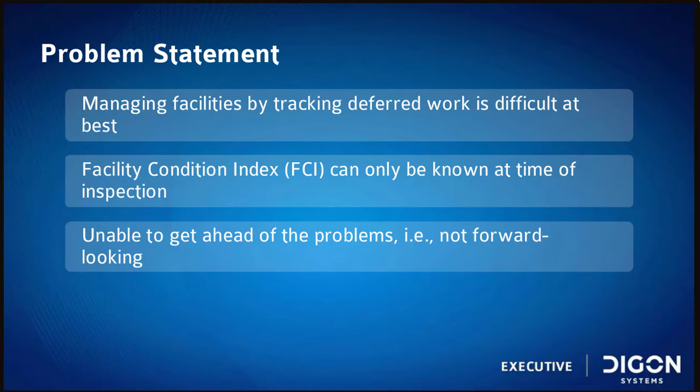With this method, the building's Facility Condition Index, or FCI, is correct for a single moment in time. In other words, that week or two when the inspections were accomplished. It's a single data point that becomes less useful to decision makers the further we get from that inspection date. We have no ability to forecast into the future with this method, other than by guessing. By using old data to guess at our future needs, we are actually trying to manage the future by looking at the past.

Imagine driving down a curvy road. The road ahead represents the future, and the curves represent the uncertainty of your facility's needs. Using the deficiency model to manage our facilities, the past, seen in the rearview mirror, is all we can see. The future is obscured. If the rearview mirror is the only tool available to the driver, it only takes one curve in the road ahead to cause an accident.

And yet, every day, facility managers use deferred maintenance, or FCI, to guide future facility budget needs. Seems a little crazy, right?

Seeing this, the Department of Defense sought out a new solution. In February of 2013, the Institute for Defense Analyses published a study of federal facility management practices and made recommendations for the future. They said that we really need a metric-based, data-driven system that is continually updated so data remains accurate and relevant. It should be forward-looking and risk-focused. This would allow anticipation of facility problems coming at us rather than just reaction to problems that have already arrived.

Later that same year, in September 2013, the Office of the Undersecretary of Defense for Acquisition, Technology, and Logistics mandated that all of the Department of Defense, or DoD, will use the Sustainment Management System, or SMS, as the system of record for strategic facility planning. The memo, which you can read by clicking on the View Document button, gives reasons for the decision, such as standardizing the facility condition assessment process, ensuring reliable, consistent data, and giving more credibility to the DoD Asset Management Program. Since this solution is a federal asset, it is free of any licensing cost for government users.

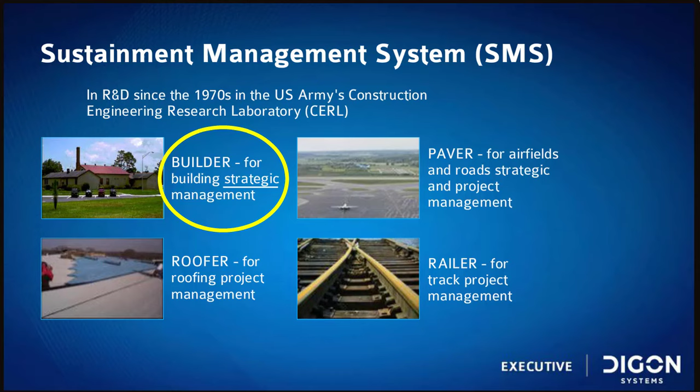The SMS embodies Builder, Paver, Roofer, and Railer. Each of these systems is specialized for their focus areas: buildings, pavement, railways, and roofs. Builder, though, stands out as a purely strategic planning tool and not also a project execution tool.

Builder is web-based, so it can be accessed from any internet-connected computer through its web browser. The data in Builder is stored in the cloud and is available immediately whenever an analyst needs it, but is highly secure against outside intrusion. The modern web service infrastructure enables our CMMS system to integrate with Builder. Keeping your new strategic planning tool connected to your existing project management system is critical. Builder data can be downloaded into offline, handheld tablets for easy field assessments away from internet connectivity.

The Builder software breaks every building down into small pieces called sections. Examples of sections are, for instance, 3,000 square feet of exterior brick wall, one 30-ton chiller, 45 interior wood doors, or all exit lights on the 5th floor.

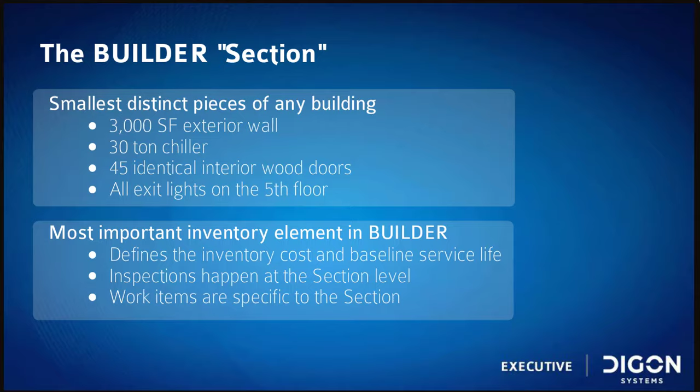Inventory details are captured for each section, enabling Builder to know expected life and replacement costs. When inspectors are in the field inspecting a building, they're inspecting individual sections. And when Builder determines that work is needed, the work items created are at the section level. In fact, almost all of the calculations in Builder happen at the section level.

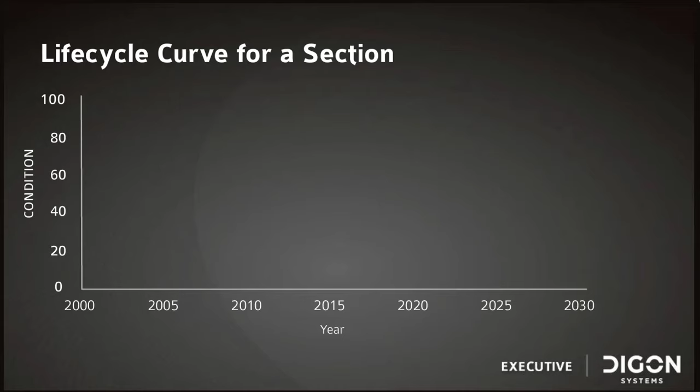Builder already knows certain things about all sections in a building. This preloaded data comes from industry-recognized construction data providers. One of the most important things Builder knows is each section's expected lifespan, or more precisely, life cycle.

This graph shows a generic section life cycle. Time is on the x-axis, and the section condition index is on the y. When the section is installed, it is brand new, and its CI is 100. As time passes, we move along the curve to the right. Notice how the condition remains high early in its life, but as it gets older still, deterioration accelerates more rapidly.

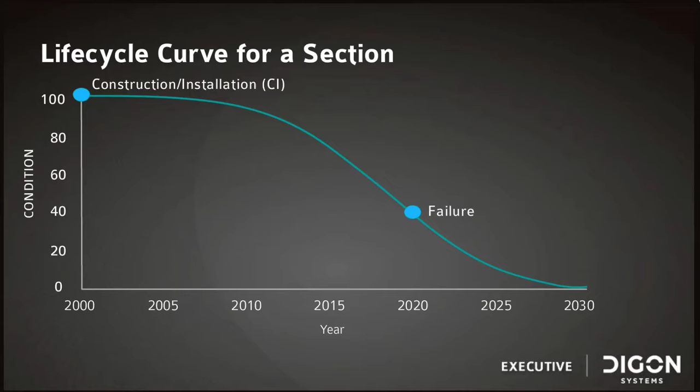When the CI reaches a score of 40, it is no longer reliable, and so Builder considers the section to be at failure. This section's expected service life, then, is 20 years. The Builder database contains curve data similar to this one for thousands of sections.

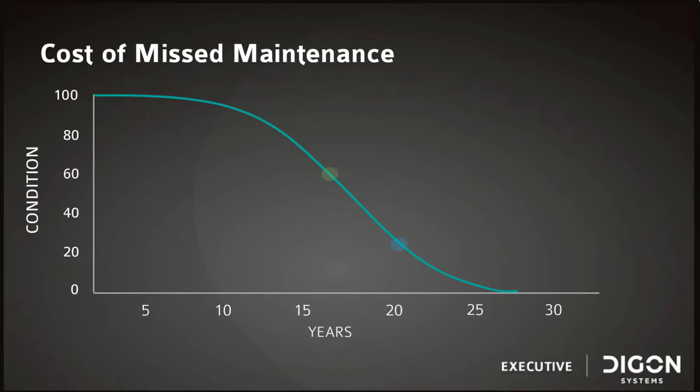Builder also knows the cost to repair or replace each section in a building. With this lifecycle chart, again depicting a generic section, we can discuss the cost of deferred maintenance and the proper timing of that maintenance to minimize the cost. The two dots on the curve show different investment decision points. The green dot, at a CI of 60, represents a time when Builder might recommend a repair to this section.

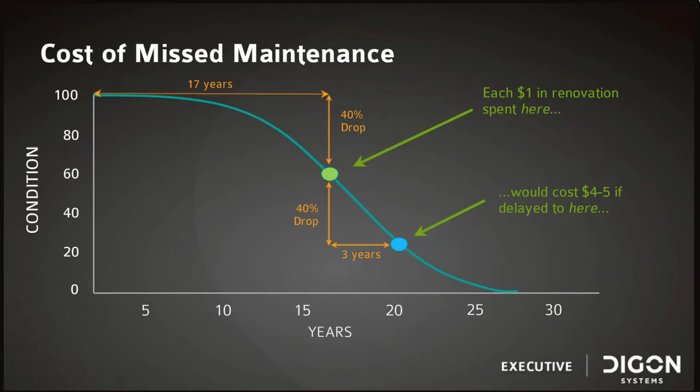The blue dot further down, at a CI of 20, is past the failure point. To repair the section at the blue dot would cost 4 to 5 times as much as it would have cost to repair it earlier, as Builder recommended. Notice also how the same amount of deterioration, 40%, occurred during the last 3 years as occurred during the first 17 years. The cost of deferred maintenance is high and measurable. This is one way Builder can help you optimize your investments by minimizing the costly penalty of missing timely work actions.

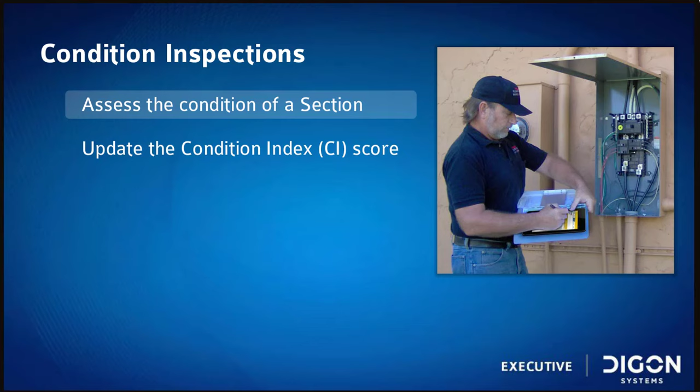Using the RS Means lifecycle data and graphs to predict section condition works well, but it can't predict local conditions or events that are outside of the standard data model. Additional real-world data from the field is needed to make that curve reflect the condition of the building and sections even more accurately. The Builder condition inspection is performed by trained inspectors to assess the condition of a section at a single point in time. Think of it as a snapshot. The inspection updates the condition index.

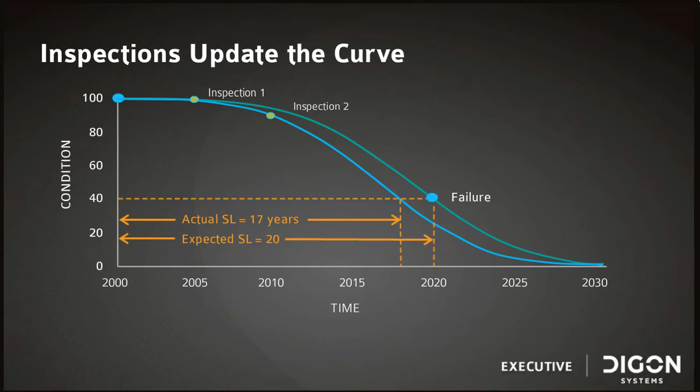Notice what Builder does with this new data. It updates the CI with a new lower rating and adjusts the remainder of the life cycle curve to reflect the higher rate of deterioration. Now, rather than an expected total service life of 20 years originally predicted, this section has a shorter expected service life of only 17 years because of the on-the-ground data provided by the inspector.

Okay, so we've talked a great deal about sections. It's time to show how they relate to the big picture. Sections collect and organize the assets inside a building. Taken all together, they reflect the building itself. But before we can show you how that happens, we need to present the organization of those sections within a building. Builder uses the Uniformat II system, which is an industry-standard method of organizing the parts of a building.

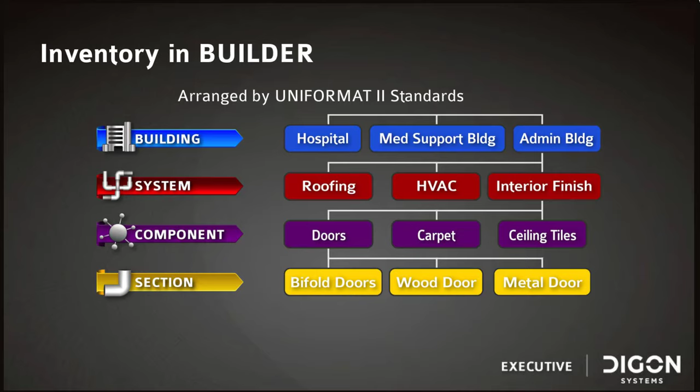The building is made up of many systems, such as roofing, HVAC, and interior finishes. Every system is comprised of components to further categorize the inventory. So the interior finish system has doors, carpeting, ceiling tiles, etc. And finally, under each component resides the many sections. So under the doors component, we might find bifold doors, wood doors, and metal doors.

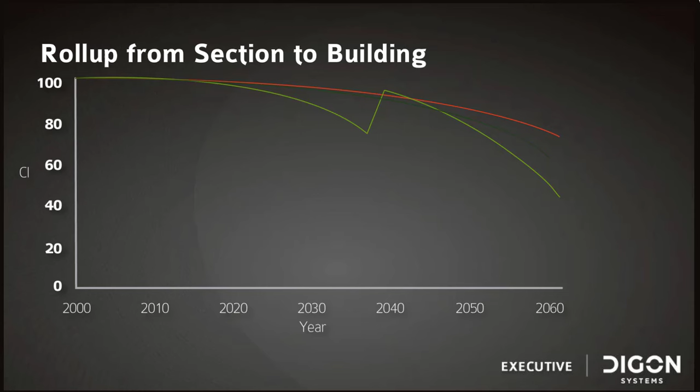Here is where the real power of Builder starts to become evident. A building can be comprised of thousands of sections. What if we could see them all at once? Let's start with exterior walls, then windows. Next, let's add carpeting. You get the picture. Each curve represents a section, and they add up quickly.

By overlaying the life cycle curves of each of those thousands of sections onto one graph, we can see the condition of the entire building in one glance. The only problem is the sheer quantity of data in front of us and the difficulty reading it in this form. This is where the roll-up becomes necessary.

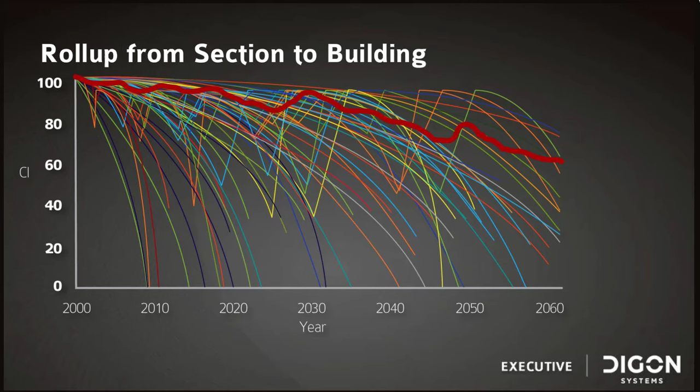The Builder software takes all of this data from the sections and will roll up the condition scores. So Builder can provide an overall condition rating for a specific component or system, or most usefully, the entire building. This building level condition index is called the BCI. You can see by this graph how the BCI, indicated by the thicker red line, is calculated as an aggregate of the section condition indices.

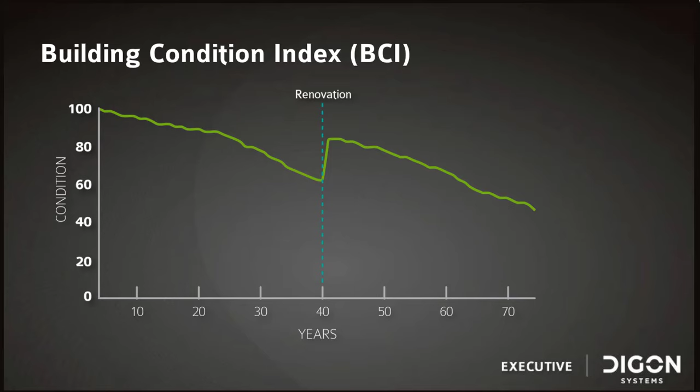Each little bump represents a small increase due to a section or sections being repaired or replaced at that point in time. The large jump you see near the middle of the curve is due to a major renovation to the building, which repaired or replaced many sections at once. The BCI is a facility manager's metric for assessing the building's overall reliability. As the line gets lower on the scale, the reliability of the building as a whole decreases. But BCI alone does not provide the full picture of our building.

Adding to that full picture is another of the high-level metrics in Builder, the functionality index. A building's FI score indicates its ability to serve its intended purpose. For example, how well does this new office building fulfill the role of division headquarters? The questions that lead to this score include configuration, energy usage, and compliance issues like ADA.

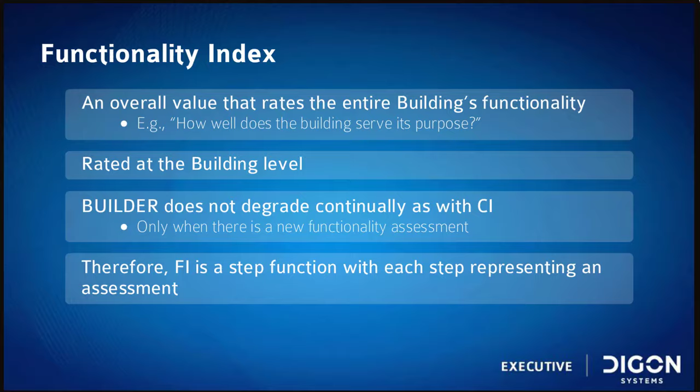Functionality is assessed at the building level only, so smaller parts of the building, such as sections, are not rated individually as they are with condition rating. Another difference from condition rating is that the FI does not degrade continually in the software. The FI changes only when there is a new functionality assessment. So it ends up looking like a step function, with each step representing a new assessment.

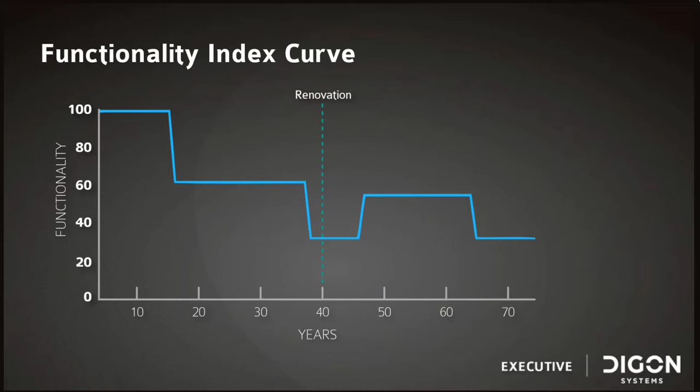Here is a functionality curve, if you will. Each time the line drops or rises, a functionality assessment has occurred. Notice that the major renovation to the building did improve the FI rating, but the improvement wasn't recorded until several years after the renovation was completed. The functionality improvement had to wait until the next assessment occurred to make it into Builder.

The single building level metric that can be used to identify how well a facility performs is the Performance Index, or PI. Derived from combining the BCI and FI scores, the Performance Index gives planners and managers an idea of a building's overall ability to support the mission reliably. Now we're able to see this big picture of how our building is doing. So the commander now has a metric that can give her a level of confidence that the base hospital can meet the demands of the mission without failure.

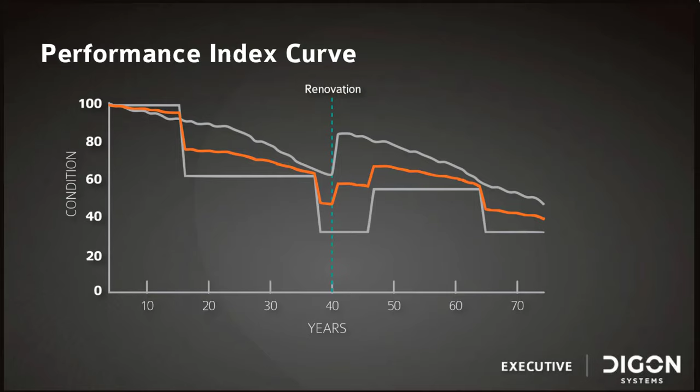It's a rating of a building's overall performance, and the algorithm uses a combination of the BCI and the FI to calculate. Here you can see how the Building Condition Index and Functionality Index lines in gray are combined to create the Performance Index in orange.

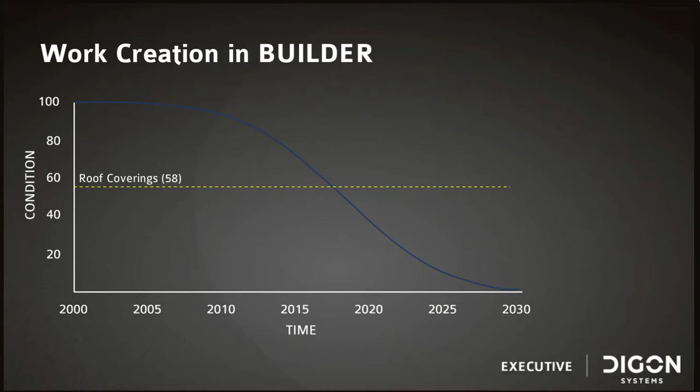With a good understanding of the condition curves and indices, we can now move on to work creation in Builder. This is the process where Builder determines that a section's condition is below the standard set by the organization. In this case, we have a section of roofing. The standard that has been set for this section is a CI of 58. This means that the Builder user wants this section to be maintained at a condition index of 58.

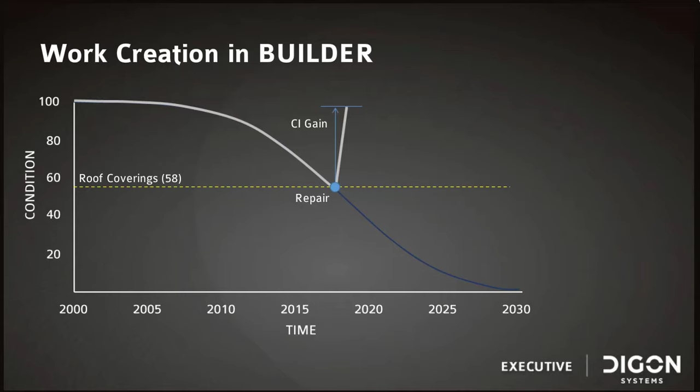When the section falls to this level, Builder assigns that section to be repaired. Once that work is completed and the data is updated in Builder, a new curve is drawn for that section. You can see the gain in the condition index to a nearly new state, or a CI of 95.

Then a new but steeper curve is drawn to the right. It's steeper because repaired items degrade faster than brand new ones. Service life was added to the section, extending its service life by about 10 years.

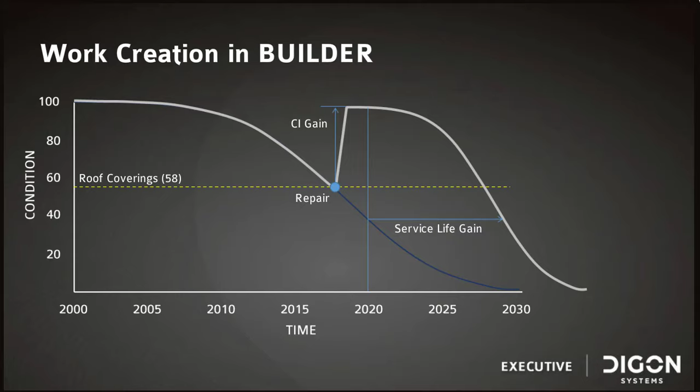In a traditional inspection, the assessor identifies work. In Builder, the assessor tells the organization the condition, and the organization can set what is good enough and what needs work with a uniform and systematic approach.

We talked a moment ago about how the system creates work. This was a prelude to the work configuration process. Prior to creating the work plan, the system must learn the values of that organization.

These organizational values are translated into Builder through the creation of standards, which are like condition index tripwires, policies that guide the application of the standards, priorities determine which work items are most important, and funding, how much money is available and how it may be used.

The work configuration process is complicated, but as executive-level decision makers, it's important you understand generally how the process works so you'll know how and why your data was derived when it lands on your desk. Click play to start a short video.

Let's look at facility work planning. Work planning is the creation of work items in a building and the order in which that work should be completed. The traditional method, the one that's been around for years, is based on the deficiencies found by inspectors. Deficiencies are items which have been found to be in disrepair or are inoperative.

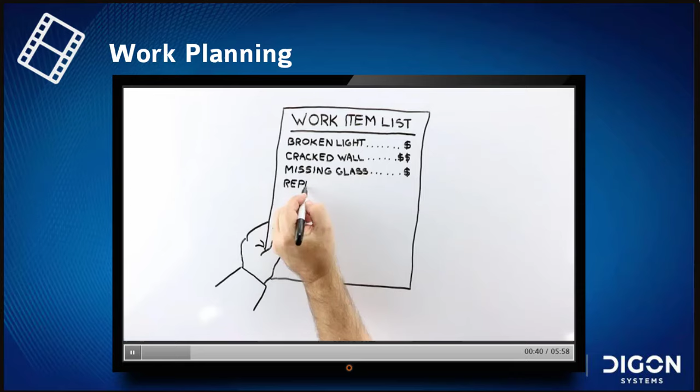The inspector finds items that are broken or are in some other way not good enough and records them as deficiencies. And then he or she estimates the cost to repair or replace them. That list of deficiencies becomes the work item list. It is entirely dependent on the perspective and experience of the individual inspectors. So there can be great variance in the results if multiple inspectors are used across your property portfolio.

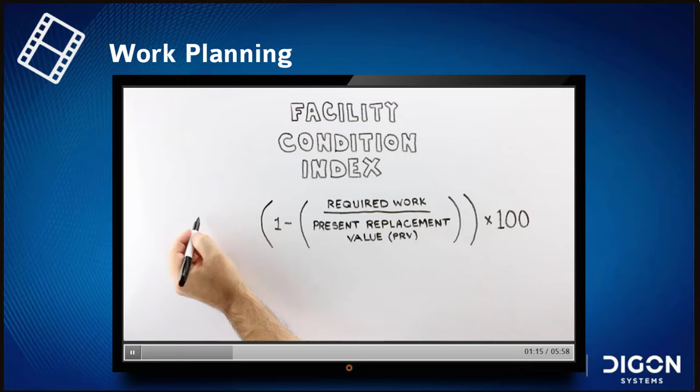One of the most important results is the Facility Condition Index, or FCI. The FCI is the cost of required work, maintenance, repair, and replacement, divided by the present replacement value of the building. In this traditional model, required work is only the deficiencies that were seen and recorded by the inspectors.

On the other hand, Builder uses an engineered, repeatable, transparent, and defendable approach to work planning. In Builder, the software looks at every single building component. Every building component is evaluated using a series of algorithms. We're going to represent these very complex processes here as a series of boxes. The first box is called the work generator.

The Builder algorithms are guided by a set of rules that have been put in place by the Builder user. These rules begin with standards, which are specific condition values that act as triggers for generating work. They will be compared against the actual condition value of the components in the building. Policies are the rules for how the standards are to be applied to the different kinds of components. These rules will be applied to each component once the conveyor belt starts up.

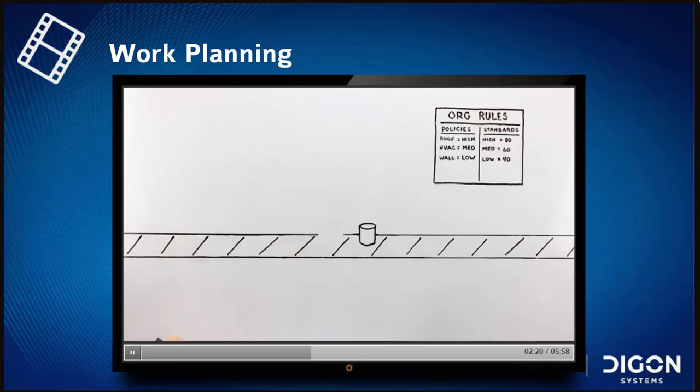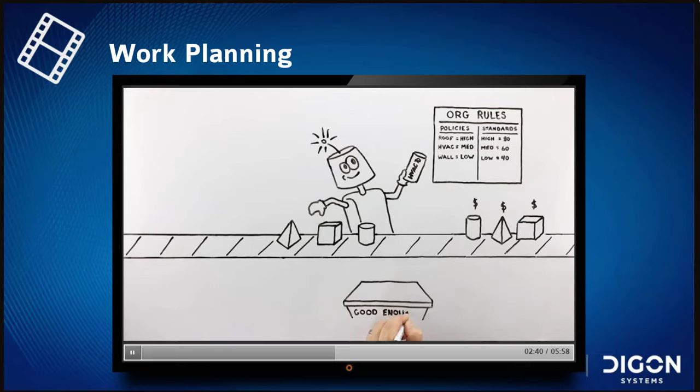The output of this box will be components that do not meet organizational expectations for condition. The organization's policies establish the condition standard that each component must meet. Each of these components, which are now called work items, also have an associated cost for the repair or replacement work needed. Components that meet organizational expectations are not selected for work and move out of the process. You probably have thousands of components in your buildings, but Builder completes this process in just a few seconds.

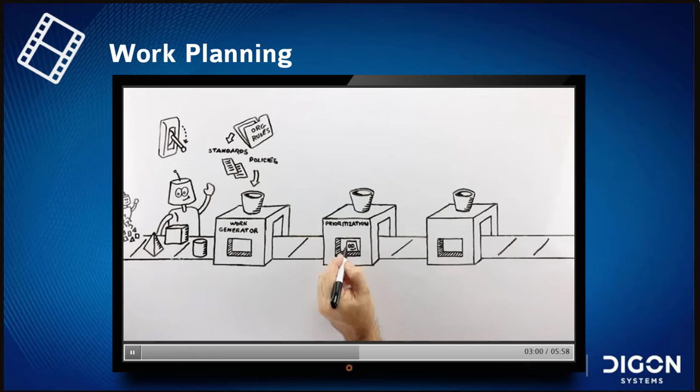The next box in this series is prioritization. This set of algorithms will determine a prioritized order to arrange the work items, based on the importance placed on certain attributes of the components themselves. These rules, which are planned and selected by the organization, are called the prioritization scheme.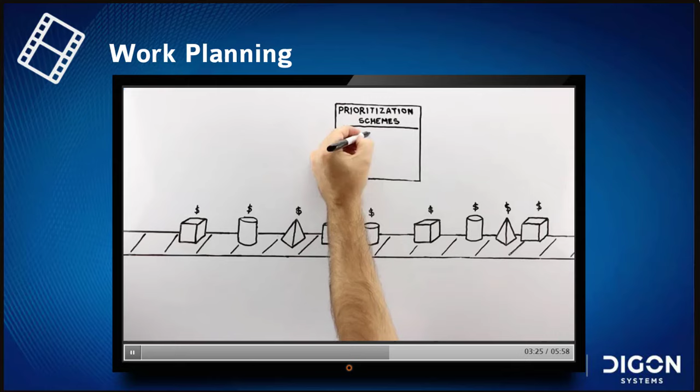The prioritization scheme embodies the fiscal, business, and mission-related principles your organization considers most important. For instance, your organization's leadership may consider avoiding the risk of building failure to be very important, or the maintenance of critical systems in your buildings may be a top priority.

Or the completion of work items with the highest return on investment may be a concern. These and other principles can be enforced in the prioritization scheme.

Each work item is compared to the scheme to determine its priority score. The output for this process is an ordered list of work items ranked by priority.

At this point, the system knows which components need work, how much that work costs, and in what order the work should be completed. These prioritized work items then move down the line to the final process, where Builder assigns funding to them.

Your organization tells Builder how much money is available for each year and any restrictions on that funding. The prioritized work list moves into the last box.

Funds are applied according to the amounts available from the organization. Top priority work items get funded first, and all monies are used to fund as many of the work items as possible. When the money runs out, the leftover lower priority items remain unfunded.

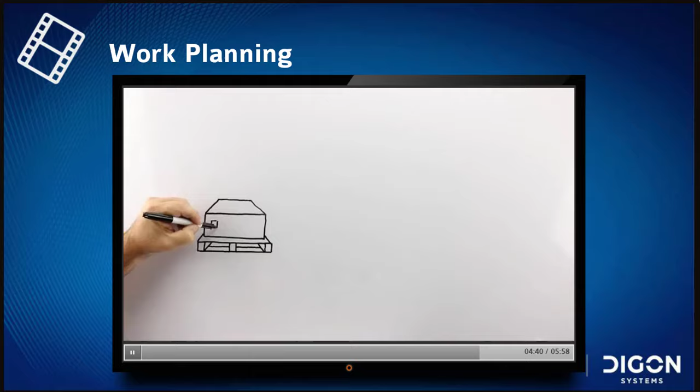In the end, two work item lists emerge from this box: the funded work items and the unfunded work items. In total, these two lists are what it's all about.

Taken together, they represent the amount of work that your facility needs. These lists can then be used for project planning, fiscal planning, or long-range scenario development.

Builder can also use the unfunded work to calculate the FCI. The cost of the unfunded work items becomes the numerator in the FCI equation.

Of course, if this funding is not used for some reason, then Builder assumes that all the work items generated are unfunded.

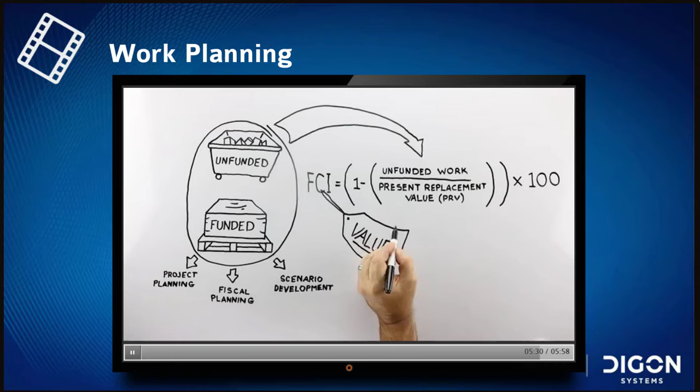This FCI value is firmly based on the consistent application of your organization's business principles, making this FCI calculation even more significant.

Now you can see what we mean when we say that Builder is an engineered, repeatable, transparent, and defendable process. Ultimately, Builder allows you to create a customized and concrete plan for spending your organization's limited money in the most efficient way possible.

Okay. In that animation, we briefly alluded to another feature of Builder, the Scenario Analysis tool. This tool is one of the most powerful features in Builder. It can project your facility metrics up to 10 years into the future.

It repeats the annual work planning process, assuming for each new year that the recommended and funded work was completed and that any backlog was passed on to the next year.

It also continues to degrade all sections, generating new work items each year as sections fall below standards. The result is insight into the long-term impact of decisions on condition, performance, and the estimated work backlog.

The scenario tool lets the analyst evaluate multiple paths with differing variables. He might vary the budget slightly in one scenario to compare to another, seeing which is more effective at maintaining overall facility condition.

He can also change aspects of the policies or the prioritization of work items. This simulation engine enables decision makers to build a more sound facility investment strategy.

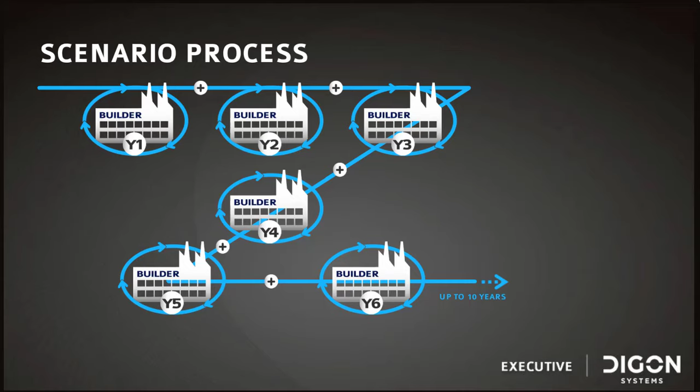This graphic helps to demonstrate the repetitive, cyclical nature of the scenario tool, running complete work planning processes over and over up to 10 years into the future. The result of the previous year's process informs the next year, and so on.

You may be familiar with the GIGO principle of garbage in, garbage out. As an engineered decision support toolset, accurate results rely on accurate data at the input. The sources of these data might be third-party assessors, on-staff facility managers, and technicians.

It's important to implement a plan to update those categories of data over time. Again, integration with a project execution CMMS is valuable, as the majority of facility changes will be tracked in that system.

Builder is designed for you, the executive-level decision maker. A real-time toolset that measures every facility using the same yardstick will help you make better-informed, strategic investment decisions.

It can allow you to anticipate, rather than react to, major failures by identifying potential issues before they occur.

And it can help feed your tactical-level work management systems with the most important, highest ROI work items. In the end, Builder gives you the right data at the right time, at the right level.